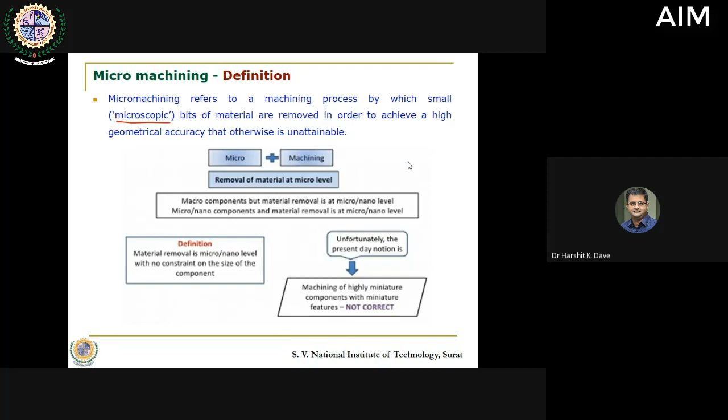Micro machining refers to a machining process in which the material removed is in microscopic range, in a very small quantity and small size, which helps us achieve higher geometrical accuracy. So our intention is to improve the geometrical accuracy. Rather than going for a tolerance of say 50 microns, I want to go for a tolerance of 5 microns. But if I'm trying to make something of 5 mm and then expect 5 microns, that is a difficult task. With 5 mm, if I try to achieve a tolerance limit of 50 microns, that is doable. So if you want tighter and tighter accuracy and tolerances, you need to work at smaller dimensions.

Generally, it is believed that the ability to obtain the tolerance level at the micro domain has to be 1/10th. So if you are trying to produce a dimension of 100 microns, you can assume a tolerance of maximum 10 microns. Now, if you have a tolerance of 50 microns when making something at 100 microns, that is of no significance. So when you are trying to produce a part, a feature, or a product in micro scale, that is usually termed as micro fabrication. But when we talk about micro machining, our intention is to create or produce a feature or dimension that is in the micro domain. Here we combine micro as a size component and machining as an activity.

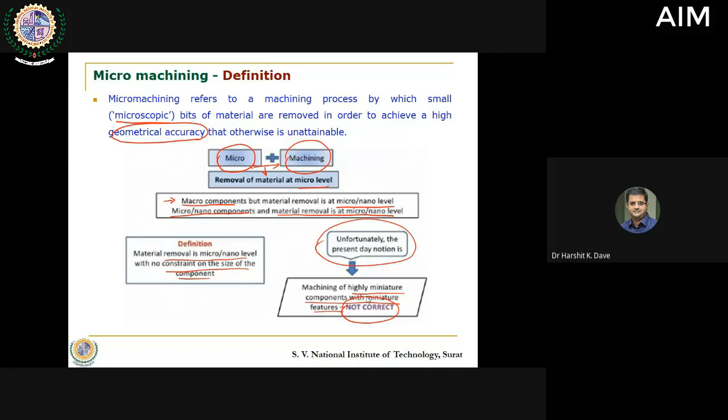Often we have trouble understanding this. We have a wrong notion that machining highly miniature components with miniature features can be termed micro machining. That is not correct. When I talk about micro machining, my intention is to create very miniature, tiny features on the part, which may or may not be in the micro size.

When we classify micro machining, there are different ways of classifying micro machining or micro fabrication activities. In case of micro fabrication, one way is material deposition and the other is material removal. Micro machining focuses more on the removal aspect. But micro fabrication also includes various deposition methods like electro discharge deposition, chemical vapor deposition, physical vapor deposition, rapid prototyping (3D printing), LIGA, and electrochemical spark deposition.

When we talk about micro machining, our understanding falls into two domains: traditional material removal and advanced material removal. If I take a simple conventional lathe machine and carry out turning, when I provide a depth of cut, I can go up to 0.5 mm, meaning I am removing material of size 500 microns.

So as per the definition in microfabrication, that can be termed micro machining because I am removing material. But am I creating a feature in the micro domain? No, I'm just removing the material. The part remains as it is.

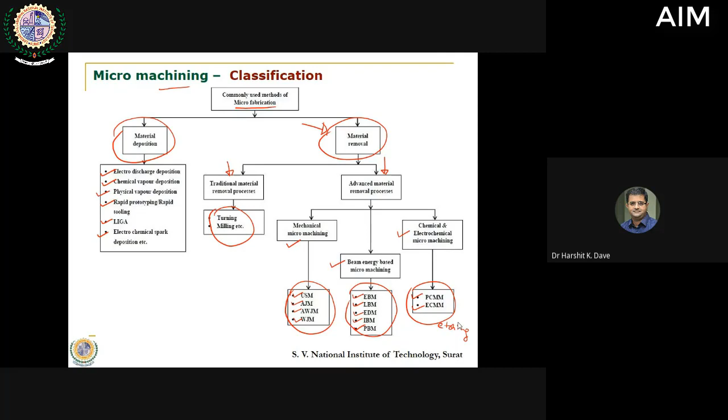The other way is termed micro manufacturing process, often from the interest of MEMS and electronics background. There the processes are classified either as MEMS lithography based or non-MEMS, non-lithography based. All processes discussed earlier fall into this category. You can have micro mechanical cutting as a non-MEMS activity, with micro turning, micro drilling, micro milling, all forms of micro machining, and finishing processes like micro grinding.

Other processes include laser based processes, thermal based processes, and to some extent fabrications into the forming, micro forming domain, also classified as non-MEMS based micro manufacturing techniques. In case of MEMS based, the most widely used is the photolithography process.

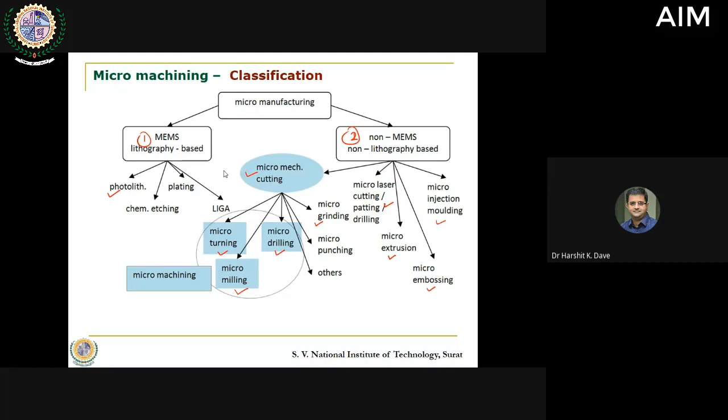I'll initiate slightly with photolithography before moving to the processes I want to discuss in detail. In photolithography, we can have additive deposition as well as subtractive etching. We deposit some material first, then remove some material, and eventually get the product. There are different ways of doing it.

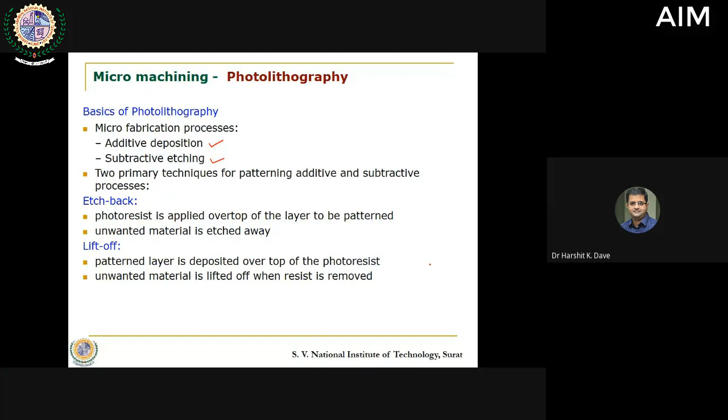One of the most widely used ways is shown in the figure. Suppose a desired material, some form of rubber or plastic, is to have features generated on it. That part is laid and deposited on a thin film, then coated with a photoresist. There is a mask - viewed from the top, if it's a round part, you deposit some sort of cover over it this way.

This is the cover. So if I take a cross section over here, I see this one. This is what I see over here. This is what is visible to us.

Now what we do is, after coating this with a photoresist, we use this as a mask and pass some sort of laser energy, or maybe some UV light, and we burn the material. So nothing happens to this part, but this part is burnt. Now it is etched, it is removed. First we deposited, and now we are removing this. So when I remove this part, and then remove this photoresist, this one is removed.

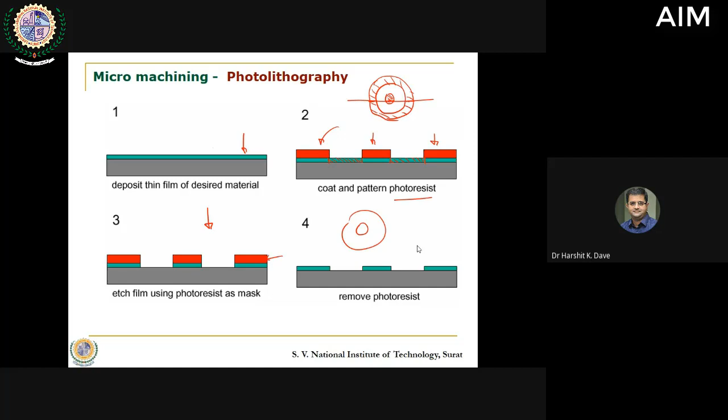So eventually you get the part that you wanted to have. This is what we wanted. We wanted to generate a boundary with a pillar inside. So this is what you wanted, and that you have created. In case of photolithography, this entire process can be finished in a matter of seconds. But the process of depositing these thin films of the desired material and then putting photoresist over it with utmost accuracy, and then passing the light, that arrangement often takes some time, but otherwise the process is very fast and very accurate. So this is how the process is done, where you use some sort of mask and some sort of light to carry out the activity.

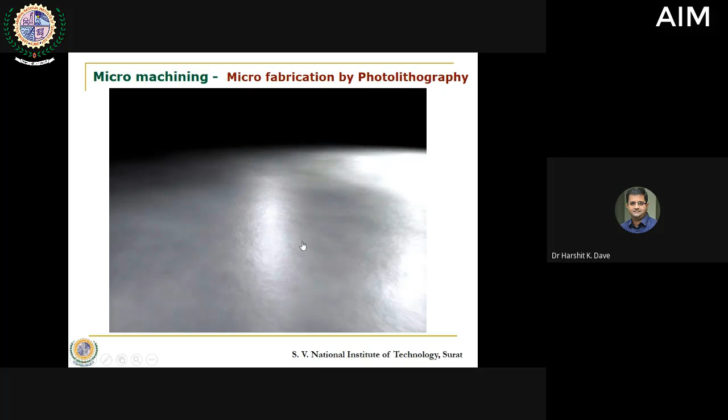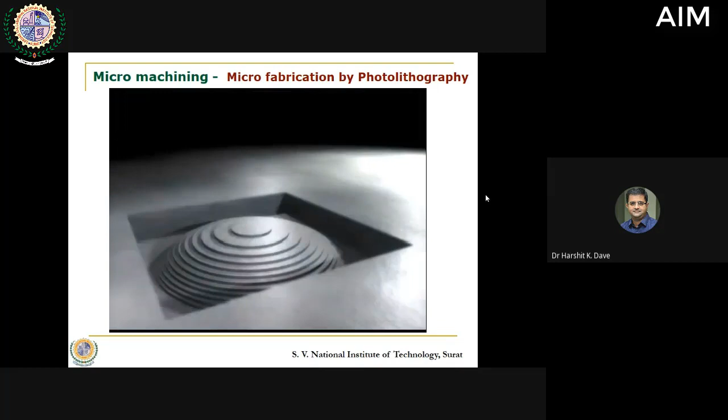This is one such video of a part. So here what you are doing is, you have laid it and you are just scanning it in a way that you are able to remove the part. So one after the other, each layer, more and more amount of material is removed, and a feature is generated.

Another process where lithography is used is the LIGA process. Here there are three aspects, three different activities being simultaneously done. The lithography is done, electroplating is done, as well as plastic molding is done. So it is possible that this process is highly accurate. It is possible to go for very high aspect ratio. It is possible to go for very small structures in the sub-micron range, and you can get very good quality smooth finished walls. If you measure the roughness of those walls, you get it somewhere close to 0.05 microns, 50 nanometers. So that is the level of accuracy you may get.

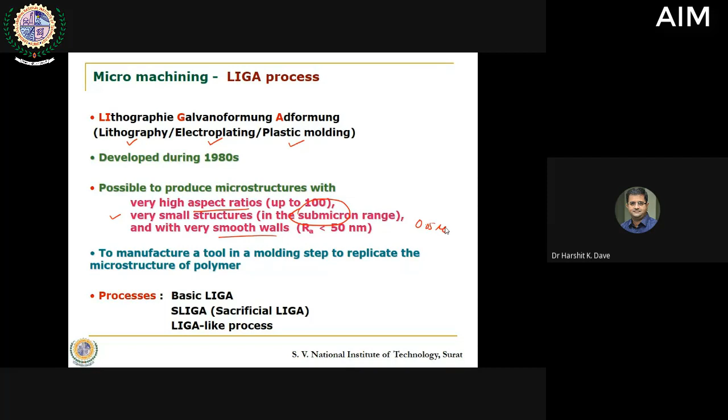But again, this process is a costly affair. What happens is you need to select a base material. Say for example, PMMA material is selected as a base material. So that is being created. Now it would be somewhat similar to the way we create a pattern and a mold. So this would be used as a mold. I use a photoresist, a mask, and then I pass X-ray radiation. So whatever feature you want to generate, that feature is present over here.

And because of these X-ray radiations, you create a specific cavity over here, and this cavity is opened up. Now here you use an electroplating process and you fill this cavity with the desired material. It can be metal particles, or through metal deposition. So that metal is deposited over here. You initially etched and created a mold, and then deposited metal into it. Later on, you carried out the same process and burned this entire mold. So eventually you get the separate metallic component. So this is how the LIGA process takes place, and you get a metallic component at the end of the process.

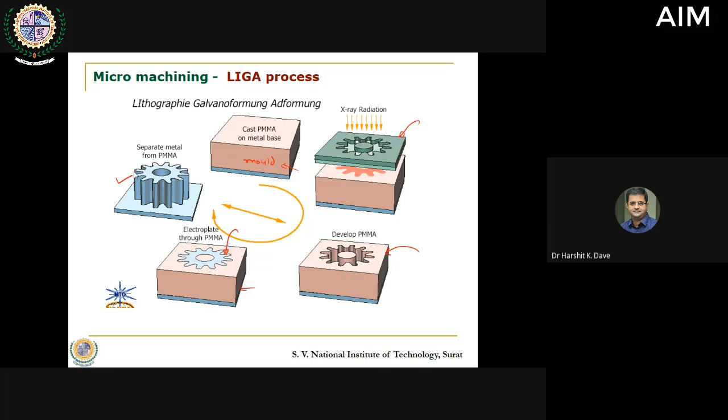Now this is the same process shown in a different manner. You have a mask membrane and some sort of absorbers. Through the absorbers, the X-ray radiation is absorbed, and that is passed through the base material, and in that resist it is protected. So here what you did was put up a mask, and on the mask you put up an absorber structure. The radiation is absorbed by this absorber structure, this pink color structure, and the rest of the material is burned. So based on that, you get a structure of the base material.

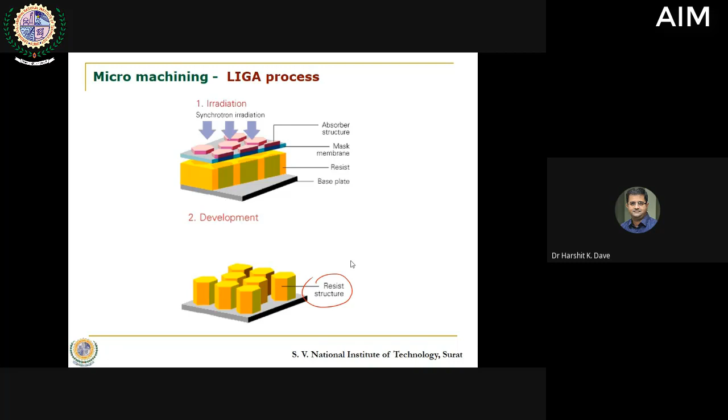So instead of creating a cavity, you have created a full 3D design over it. Now this design is filled with metal. So here you fill this with some sort of metal. You connect it with an electroplating process.

They call it electroforming. You connect it, and because it acts and attracts, this metal is deposited around, and at a later stage this resist structure is burnt and removed. So you get a different sort of mold cavity. Now large sizes of such molds can be created, which otherwise may not be possible by the usual casting process.

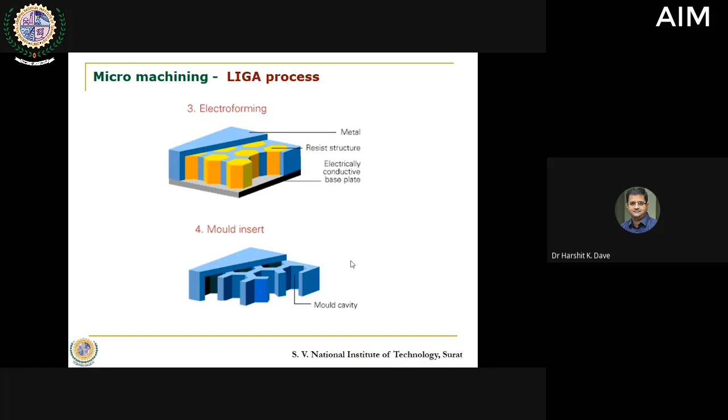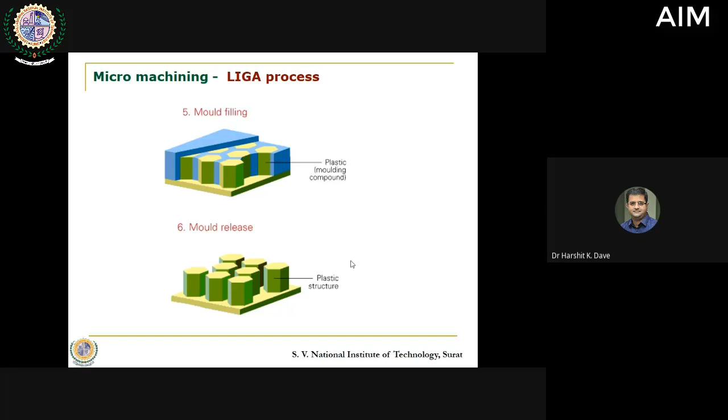3D printing is a different scenario. Even today it is trying to take over even the LIGA and photolithography activities, but this has been one of the most widely used activities as on date in the open market. So this is being done, and you fill it with some plastic material, and eventually you get the components that you decide to have. So this is how the process is carried out.

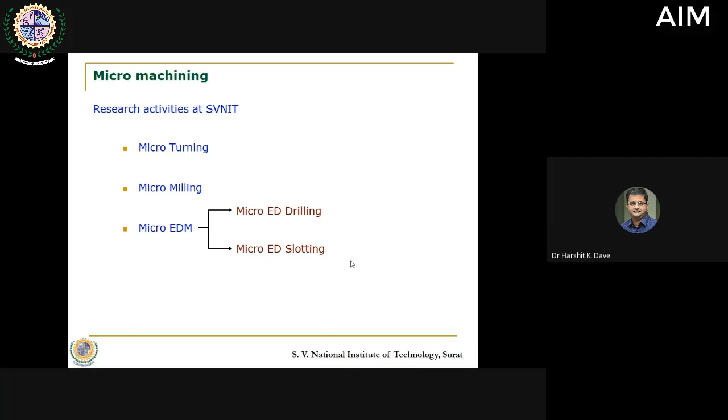Now, when we talk about micro turning, the first thing that comes to our mind is, as per our definition, the part can be large, and on that large machine or large component, we may create micro features. But yes, there are problems associated with it, which I will discuss in the coming slides. To overcome those problems, people attempted to create smaller sized machines.

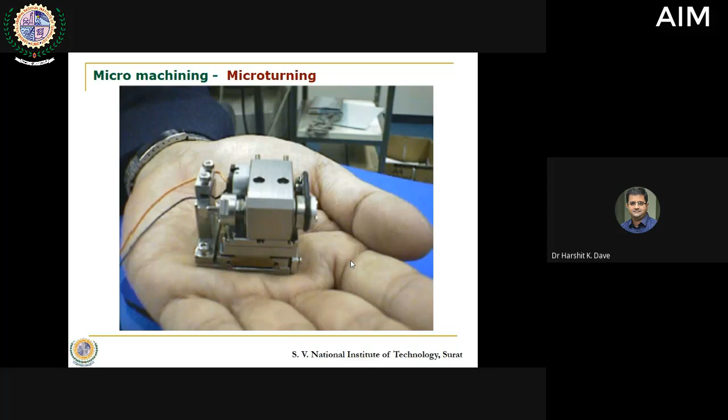The micro turning setup that we use is not as small as you see in this image, but it is possible to create a micro turning machine as small as one which can be held in your hands. That possibility is also there, and people have demonstrated working on it. However, it has not worked to that extent and has not been that successful. However, the tabletop setups are very successful in carrying out the micro turning process.

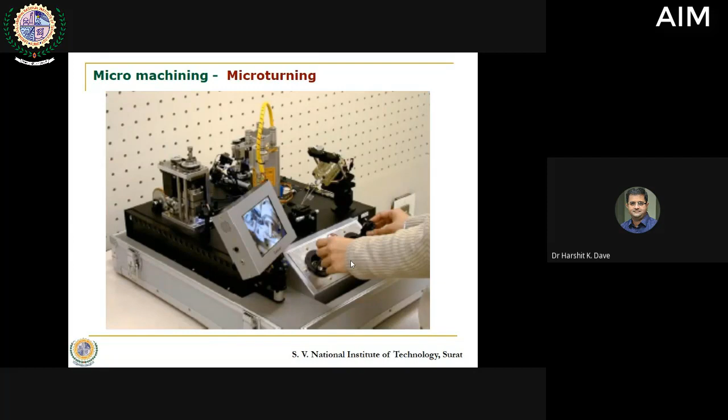Even this is another setup. You can have a micro factory with micro turn lathe machines, and then you can fit them in your suitcase and carry them anywhere you want. You can set up, do the task, and return back home. So the micro workshop or micro factory can also be set up with proper sensing devices, which can be effective to control the dimension and the process.

So in micro turning, our interest is to create features which are in the domain of say 1, 10, 100 microns. So there we will need to go for smaller tools. You can see over here the size of this tool, the face, the rake surface you can see, this is almost equal to 10 microns.

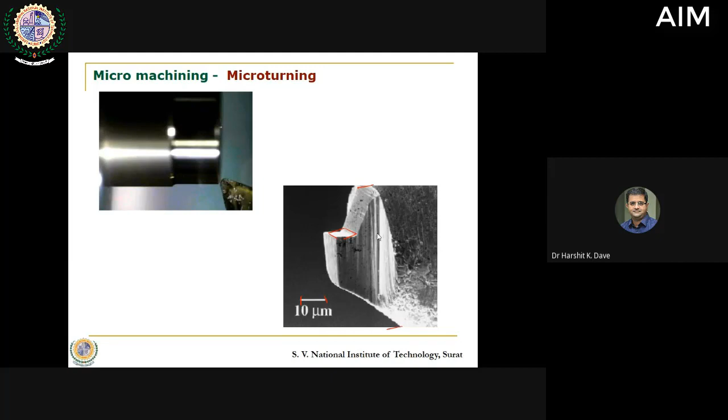So that is the small size of tool that can be generated. Assuming this would be 100 microns, then it is as good as the size of a human hair, which is around 90 to 100 microns in diameter. Just assume the size of the tool that has been attempted. This type of tool is generally used for diamond turning process, where the depth of cut is in nano features and mirror finished surfaces are required. However, there are very few such machines, maybe one or two only in India, and those can be counted in numbers if you count universally.

Now there is an interesting task reported by Professor Rahman and his team, and this was the inspiration after which we thought of working in that area. Of course, not to that level of significant work that has been done, but we have initiated doing this to some extent. You can see the micro pin that is generated. This is the micro pin visible in this image, and you can compare it with the lead of the clutch pencil we use, which is 0.5 mm diameter.

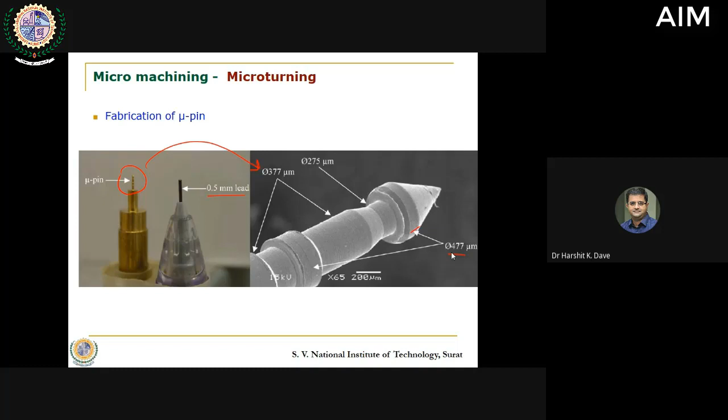So the maximum diameter that you can record over here is for this surface, which is 477 microns. So in this entire thing, you can see the tapers are generated, you can see the steps are generated. So all forms of the turning process are being attempted in this. You need to have a rod first, and on that rod you need to carry out this process.

Now the problem that you face over here, because of which attempts on a larger machine to create micro features do not work effectively - those problems can be few. One of them is the deflection that occurs in the micro shaft that you initially generate. So when you try to create this shaft of a small diameter, say if this is 500 microns...

So while doing that and machining on this part, taper is generated, the slots that are being generated have larger size grooves. In such a scenario, if you have a larger size cutting tool, it is not possible.

So theoretically, even though it is possible to generate micro features with a conventional machine, practically the problem we encounter is the deflection of this micro shaft, which would eventually lead into breakage of it. So often this does not work.

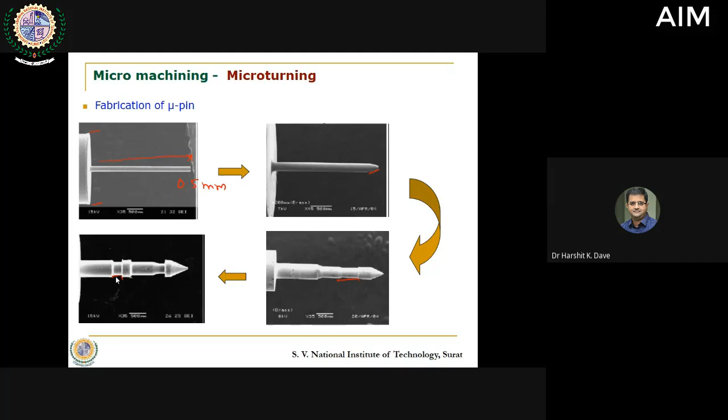This is the setup that we have used for various activities. This setup is a Hyper 15 machine. It has its own G and M code programming language, and it accepts the program through that language.

Though you can create that program in Excel or in Word, and you can import or export it to this software, the compatibility is only with the given software.

Here it is possible to work on micro turning, micro milling, micro EDM, and micro electro discharge grinding. We have tried to attempt almost all of these processes to some extent.

It is also possible to slightly modify the setup and have micro ECM also, but then you will need to work on the brine solution, and that can lead to contamination and corrosion, and that is why we have avoided going for that process.

Now, when we attempted to go for micro turning, here is the spindle, and this spindle rotates, and then whatever circular object that you want to have can be attached to this chuck.

So here you have a structure where you can attach something. If you want to go for EDM, this would serve as a tool. So this becomes a tool holder.

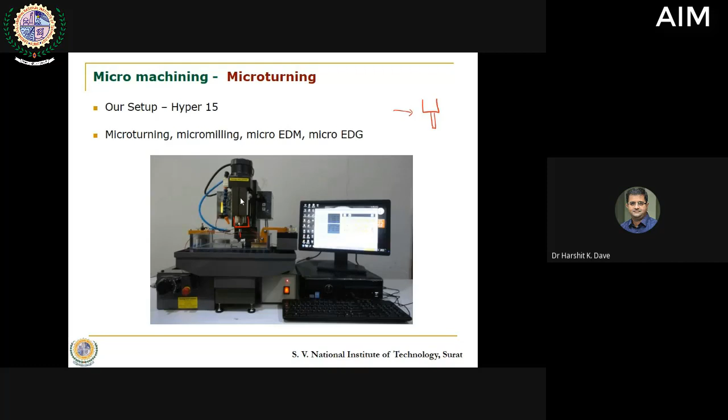Instead of conventional lathe machines, in this particular setup, you have the workpiece rotating on a vertical axis. You also need to take care of the tool holder movement and the workpiece movement with the help of proper CNC machining.

We used a PCD based micro tool, and brass was used to fabricate and create the micro shafts. The length of the workpiece that we used was 4 centimeters, brass of 4 centimeter length, and the diameter was maintained at 4 mm.

We carried out proper grinding of these edges, and we also carried out proper centering of this part when it was put up on a vertical axis. And what we tried to do was reduce this diameter from 4 mm.

We tried to reduce it to 1.5 mm. So initially up to 1.5 mm, and later we went up to 0.5 mm also.

So in all these cases, we took the depth of cut of 0.1 mm, which is 100 microns, and the machining length that we took was up to 5 mm. So eventually this is what we tried to do, this is what we tried to carry out.

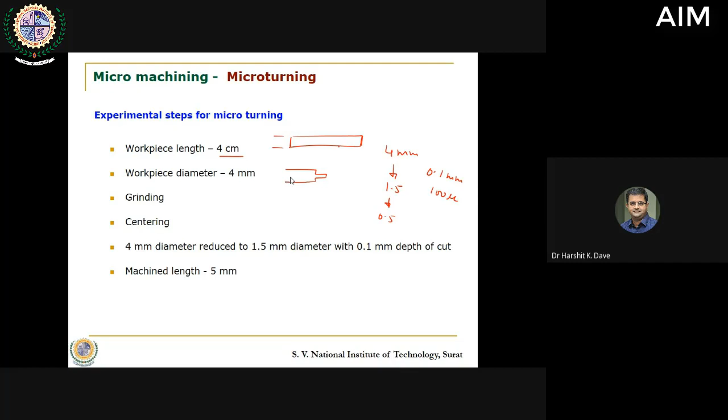Initially we tried to reach 1.5 mm, and all those tools where 1.5 mm was achieved, we further used it as a raw material for generating a 0.5 mm diameter shaft. So first we tried to create a basic raw workpiece material with 1.5 mm diameter, on which we worked to go up to 0.5 mm diameter.

This is a clip of that activity. This is a 1.5 mm diameter tool, with a depth of cut of 0.1 mm. You can see this is the PCD tool. The workpiece is rotating, and you can see the micro size of chips being formed.

We also studied the chips. The chip size ranges from 20 microns to around 100 microns in size.

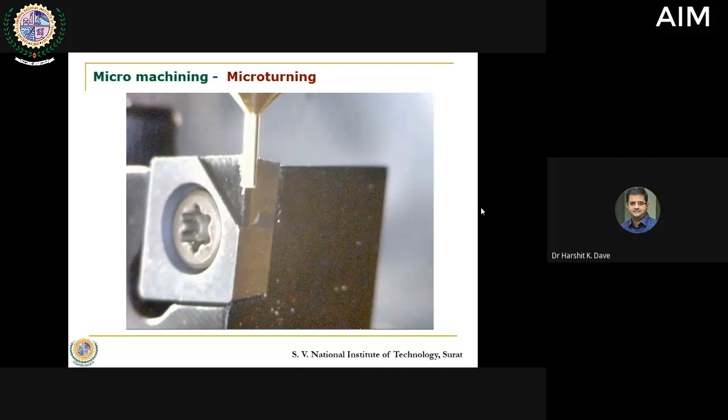But this is one such cut that is being initiated, and eventually we carried this out up to 5 mm. So this entire length that you see over here, from here to here, that length is 5 mm. And on that 5 mm, we took 0.1 mm depth of cut and started machining.

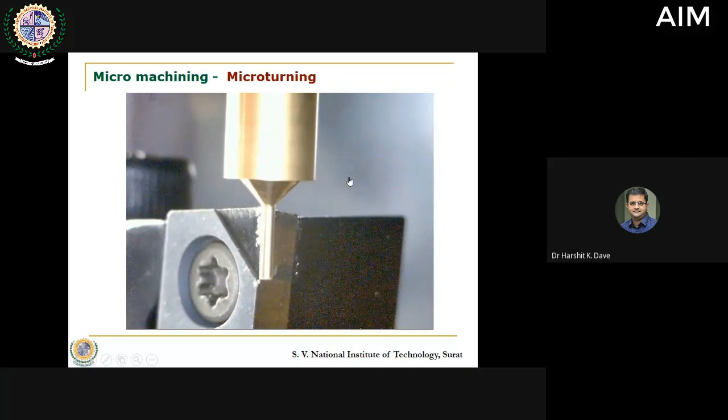Eventually, after every machining, you can assume that each machining pass set, say in 10 passes, will reduce 1 mm. So from 1.5 we went to 0.5. We had to take a large number of cuts. Now we tried, and effectively we could produce it.

One such case I want to specifically highlight. Here, at some position, we could measure the diameter at exactly 0.5 mm as per our requirement. 500 microns was possible. However, what we found is that there is a taper here.

The dimension increases, something like this. The main reason behind this is because it is a cantilever type of structure. So for a particular combination of speed, feed, and depth of cut, probably because of no support at the end, deflection occurred more over there.

So here, if this is the tool, and if this is the workpiece, and this is how the tool is placed, then because of the deflection, it did not result into suitable machining. However, in most of the cases under similar situations, this micro shaft breaks.

But in one particular case, somehow it did not break, and we observed that a sort of reverse taper occurs. So even though the tool might be coming into contact with the workpiece, it may not result into proper machining, and that may be the reason.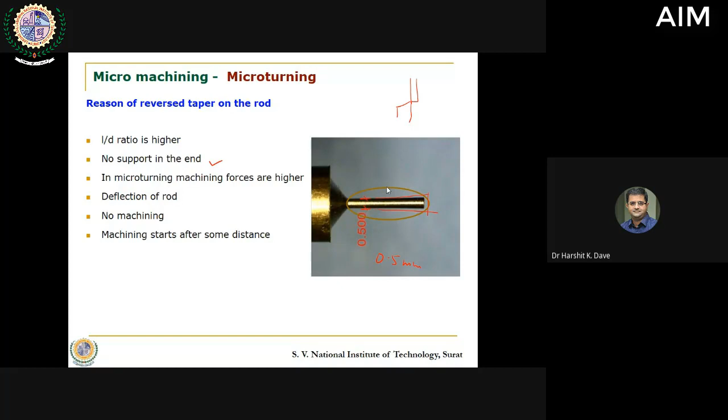Another reason we thought of was that the real machining started after moving across some distance, because the deflection that occurs at the end is larger than what occurs towards the base. So when this deflection slightly reduced, actual machining started, and because of that, probably we could get a reverse taper over this. So this is one interesting work that we have carried out.

Another task that we tried to carry out is related to micro milling. Micro milling represents the downscaling of the regular conventional milling process itself, wherein you use end mill cutters just as in the milling process, but here the diameter of these end mill cutters are in the sub-millimeter range. They are too small, less than 1 mm diameter.

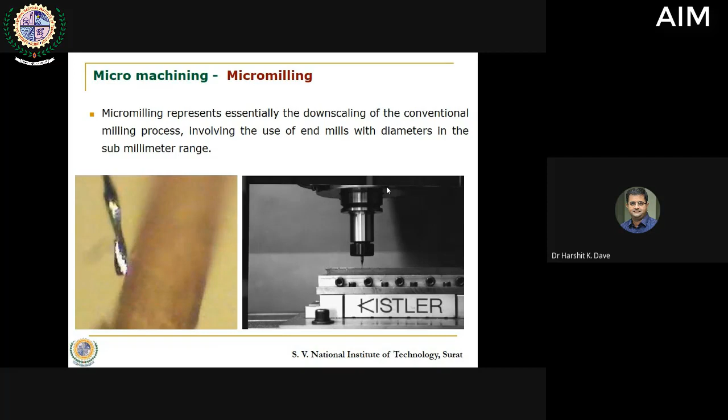There is an interesting work carried out by a group under Dr. Bamberg at the University of Utah, where they tried to produce a 4-fluted peripheral end milling cutter, something like this. This is what they tried to produce, an end mill cutter of this shape, a peripheral end mill cutter. This is what we have been using.

What they did was, initially they created a hexagonal structure. This is what they got. On this hexagon, they used some sort of machining at a peculiar angle. For example, this was machined in a way that this much portion is removed, and this portion is removed. So when you remove this, eventually here you generate a cutting edge.

Then again you remove some material from here. So this is how it worked. It may not be in the exact straight line which I am showing, but it was slightly curved. So instead of this, they made it like this. Then on the other edge, they again turned it and created an edge.

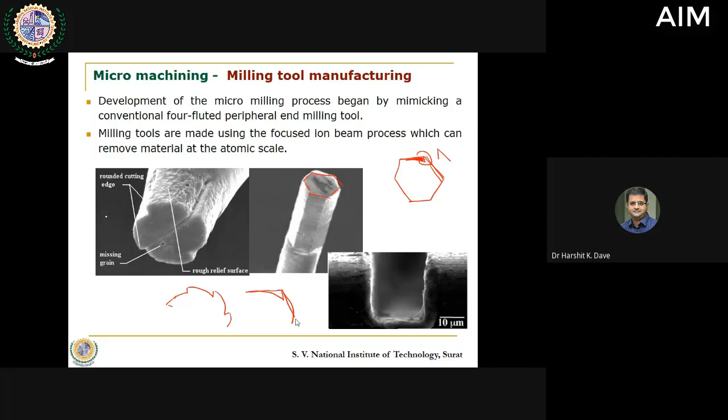So that sort of etching is carried out using an ion beam process, and at atomic level you could create a very small feature on an end mill cutter. However, this is not widely accepted, and because of cost issues, such micro-featured end mill cutters are not easily available in the market.

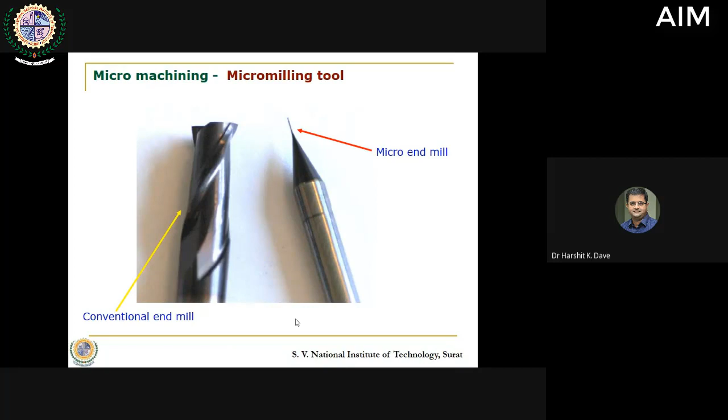But you can see if you compare a conventional end mill cutter with a micro end mill cutter, the dimension is quite clear from the image itself. The micro domain, say 0.5 mm diameter, would be quite smaller in size.

What we tried to do was create a micro 3D cavity with the help of micro milling, and we used our desktop CNC machine to carry out the same task.

We varied the speed between 1000 to 2000 rpm, and varied the feed from 10 to 50 mm per minute. We maintained a uniform depth of cut of 25 microns in each cut.

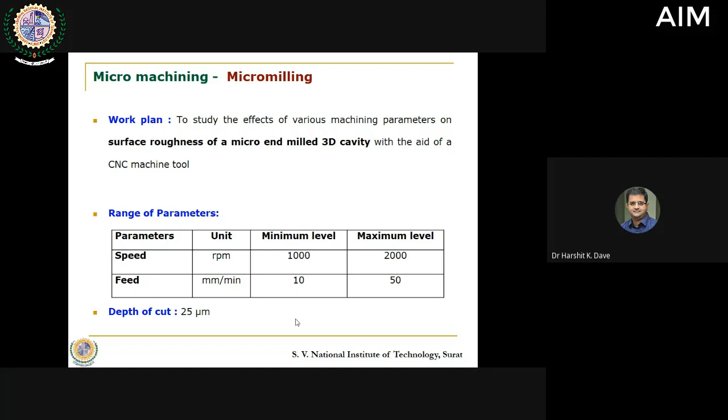We used aluminum as our workpiece material and created a specific size of cubic part. We machined it well on all 6 sides and carried out buffing to get the best possible dimensional and feature accuracy.

We used a micro end mill tool with a tip diameter of 1 mm, since we did not have a 0.5 mm tool at that time. So we used the 1 mm tool to generate micro features starting from 25 microns to slightly larger size. This was a tungsten carbide tool coated with a titanium, aluminum, chromium based coating material. The shank diameter was 3 mm.

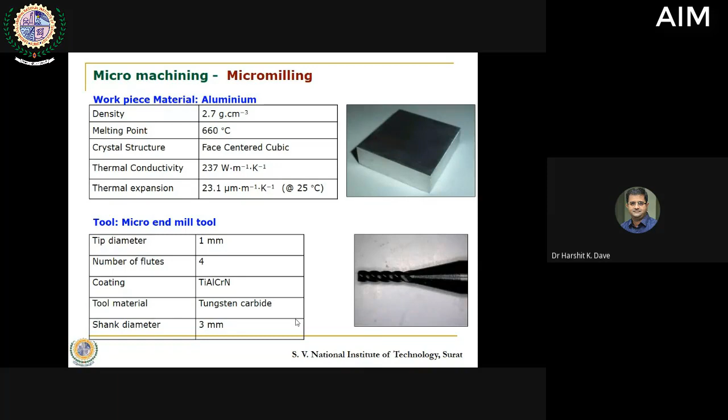Now what we did was create steps over it. These are the features that we created. So on this workpiece, on this edge, you can see the edge that we created over here.

First we removed this entire plane and created one step. Then we removed this much square surface and created another step. Then we removed this smaller patch and created another step. Finally we created the smallest part, which gave rise to this step.

So this is the real workpiece material that is visible. You can see the steps that we have created. We maintained the width of each step as 1 mm, and subsequently the size reduced from 6 mm to 3 mm.

The total height of this feature was 1 mm. So the total height of this step, if I see this step, is 1 mm. And each step that we generated is 250 microns.

So though we used a regular desktop tabletop CNC milling machine with a 1 mm diameter cutting tool, we tried to produce features in the micro domain. We then observed it under a vision measuring system to check the dimensional accuracy and the quality of the surface generated with the help of that setup.

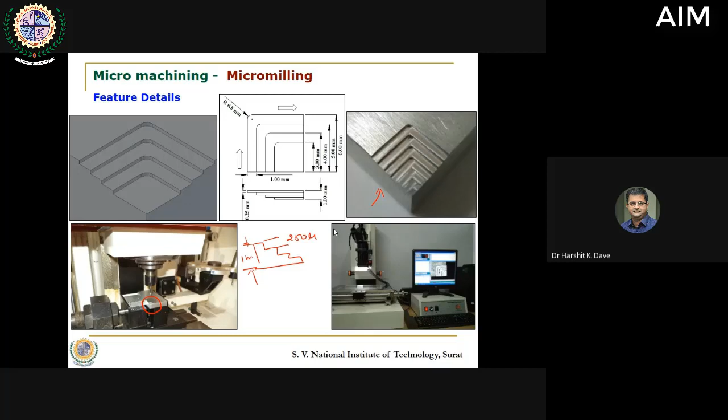You can see this activity being carried out. Here you can see our XL mill, the MTAB CNC milling machine.

Though the quality is poor, because at that point of time we did not have a proper camera to capture it, and there is a glass cover in between, which is why the recording is slightly poor.

But you can observe that this step is being generated right now. The tool is passing over one side, and then it moves along the other side. This is probably the edge of the first part.

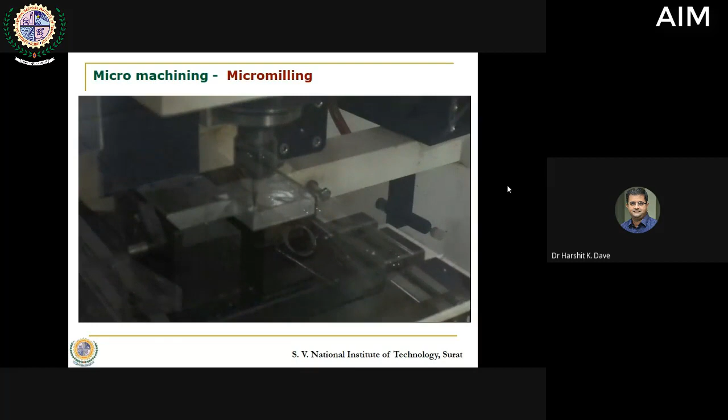It is returning back, and one such entire layer is being removed. So now this is the second pass, being initiated. This was not that clear, but from here it might be slightly clearer. You can see that these steps are being generated.

What we did was try to measure its dimensional accuracy and form accuracy, and then measure the surface roughness on it. Because the end mill cutter used is 1 mm in diameter, you do not have an option to reduce the width of this path, so this remains 1 mm.

This is the entry side. The tool started moving from here and eventually went this way. Then here, this was one thing that was cut, then we cut this over here. This is how it goes.

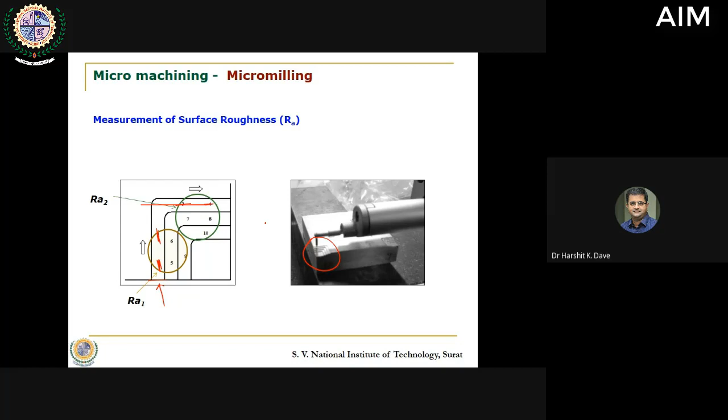So these are different points where the roughness was measured. Initially roughness was measured at this location, then at this location, then over here, then over here. This is how it went through all the particular positions of these steps. What we found...

One important finding was that if we are able to lubricate during the process, constantly supply drops of lubrication - somehow kerosene did not work, regular dielectric fluid did not work, the oil that we usually use for lubrication did not work. I don't know the reason still, but diesel worked well. So drops of diesel were put, because of which the finish obtained was in the range of sub-micron level.

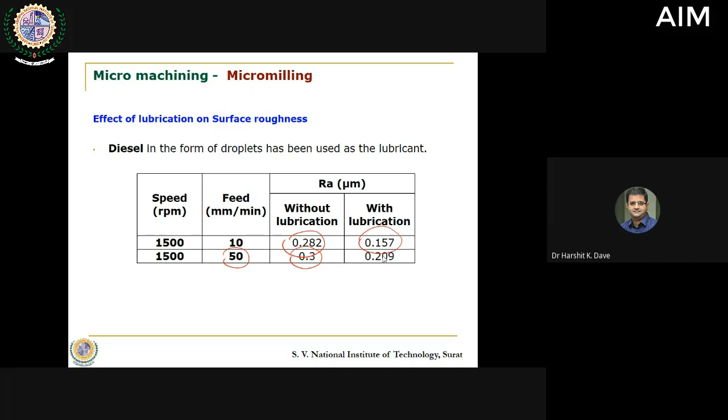Without lubrication, you got a roughness value of almost 0.3 microns, and with lubrication it reduced to half, 0.15 microns. Similarly, for the higher feed, we got a roughness of 0.3 microns, which is almost similar to what we get, but here at higher feed we got a roughness of 0.2. So there is probably a reduction of one-third of the roughness value. That is one good observation we saw.

The other observation was that the roughness was greater at the exit, so Ra2 was more than Ra1 for all experiments. That may be because the chips would accumulate at the tool tip and resist the actual machining being carried out. We observed that tiny particles would adhere to it, so there was built-up edge formation to a larger extent, and the aluminum material would stick to the tool, and then you will have to clean it. In the meantime, it might get slightly blunt and result into poor quality of machining at a later stage.

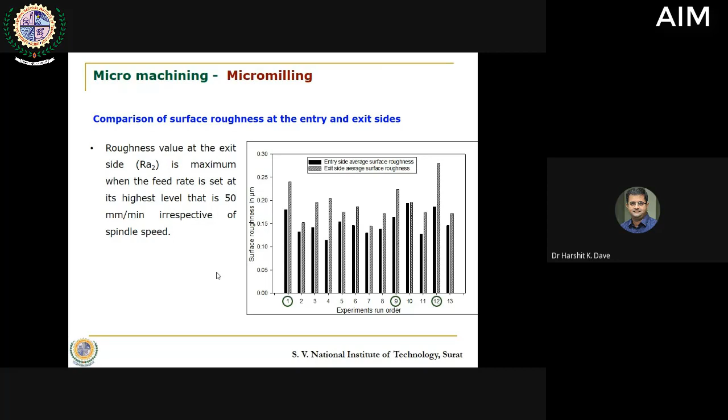When the feed value was maximum, we found that feed has the maximum effect when the feed was at the highest level. In this particular case of reading number 1, 9, and 12, the feed value was at 50 mm per minute, which was the highest selected value. So whatever be the spindle speed, when the feed increased, we observed that roughness increased. So feed is found to be an influential factor on roughness value at micro, sub-micro level instead of the spindle speed value.

The third aspect of our work is related to micro EDM. In case of micro EDM, what you do is you melt the material and you vaporize the material for the material removal. This happens - the melting and vaporization - in a fraction of a second, and that too happens thousands of times. So the feature quality is quite better than what turning or milling would give you, and the process may result into reduction in the tooling cost because there is no contact between tool and workpiece.

However, there are some differences if you compare EDM process and micro EDM process. The first one is related to the circuitry that it has. In EDM nowadays, you don't have the capacitor circuit. Nowadays it is fully enabled with electronics, and the control of the timings of on and off time is done through electronic pulses, which is why those on and off times are known as pulse on time and pulse off time, because in EDM you do not control them with the help of charging and discharging of capacitors.

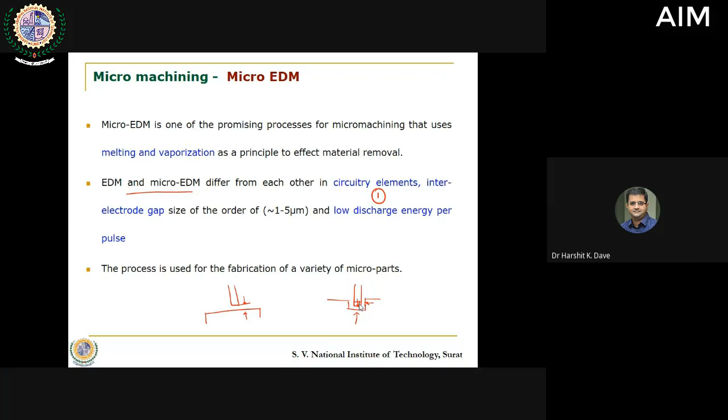Another important difference is related to the amount of energy used per spark. The discharge energy per pulse per spark is very less - almost 1,000 times less than what you have in case of EDM. So it is possible to generate even smaller features than what you generate in regular EDM process. So microfabrication with micro EDM is a very fantastic task.

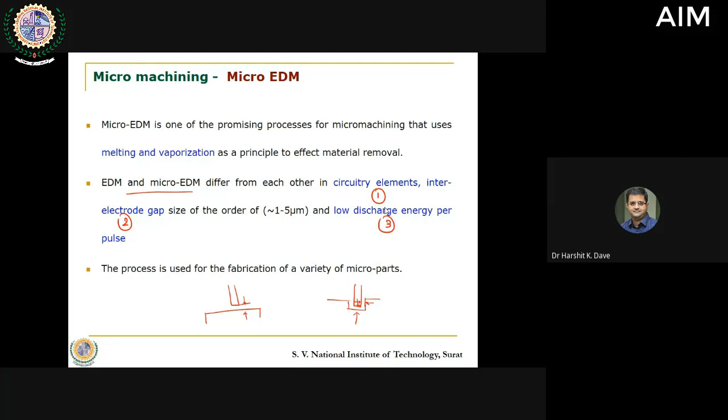Only problem is it is a very slow process, slower than the regular EDM process. If you carry out a task on EDM to remove a certain amount of material, or reduce a feature by 1/10 of its size, the time required on EDM is 1/10 of what you require on micro EDM. So the simple tasks I am going to show you would take around 30 to 40 hours of machining. That way, it is not a suitable process for producing parts in large quantity.

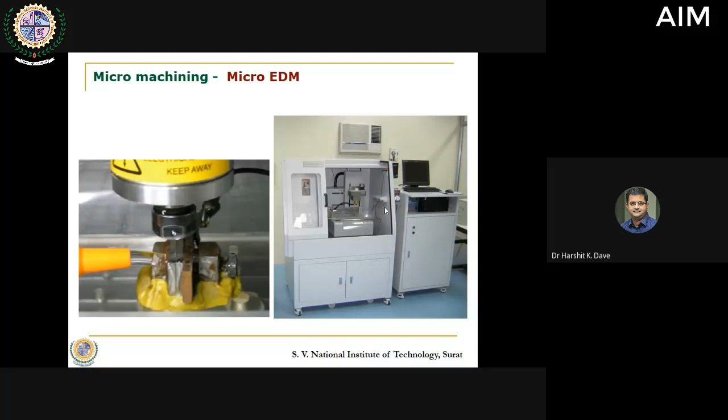This is one such setup of micro EDM which is commercially available from Mikrotools, a Singapore based company, devised by Dr. Rahman. One such machine you might have seen if you visited IIT Bombay or IIT Kanpur.

There are various applications in the micro EDM domain. You can fabricate micro holes, create micro pins, say micro electrodes for micro EDM which would be used as micro tools. You can generate micro slits and grooves. A semi-cylindrical groove of 10.5 plus or minus 1 micron was produced.

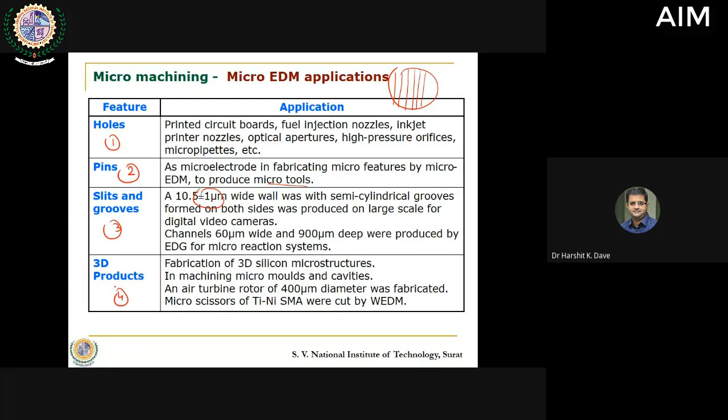Similarly, in cryogenic applications you need to generate large surface area, so fin structures are generated. These fins generated on a copper tube have a width of 10 microns, and the space in between is around 50 microns. Generating that is also an interesting task. Similarly, 3D patterns and 3D objects can also be generated with the help of a micro EDM machine.

There are different variants of micro EDM. The regular one is the micro die sinking process. You can also carry out micro wire EDM, micro electro discharge drilling process, electro discharge grinding or wire electro discharge grinding process, and electro discharge milling. To some extent you can also work on reverse micro EDM, wherein instead of generating cavities you generate 3D features. In a way that leads to a process somewhat like 3D printing.

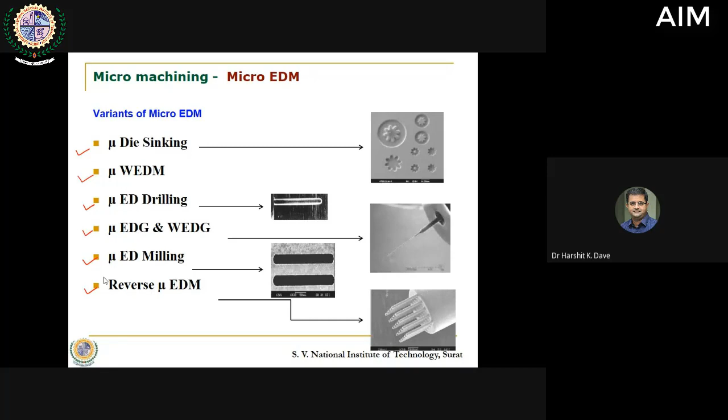Now we initiated some work on micro EDM where we wanted to carry out the drilling process initially. We used aluminum thin sheets having thickness of 0.28 mm, 0.38 mm, 0.53 mm and finally 0.71 mm, all within the micro domain range. These sheets were cut into pieces of 25 by 25, cut from a larger sheet one by one. This was required to ensure the pieces could later be made properly flat so there is no discrepancy in the features we generate.

We used tungsten rods as our tool material. The supplier of the machine provided tungsten rods of 0.3 mm diameter, 300 microns, but the length is 12 inches. Now you might think that because this is 0.3 mm, we can easily break it. If you try to break this, something happens. Or you can think we may use a mechanical hacksaw and cut it - that is also a possibility.

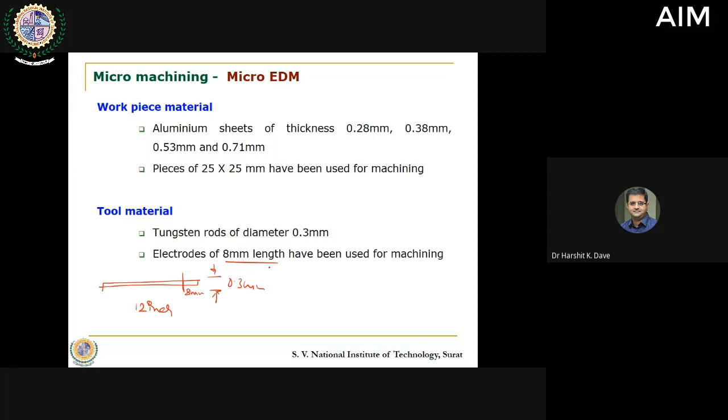Now that was a very tedious task. We wanted to cut electrodes from this with a length of 8 mm and 0.3 mm diameter. That is what we wanted to do.

Now when we tried to cut it through scissors, something like a mechanical scissor, a crack initiated and propagated inside - it was fully cracked. And when we tried to cut it with a hacksaw blade under the minimum possible cutting condition, some pinch effect was visible at the end. You can see it is not perfectly flat and perfect diameter without discrepancy - there is some pinch effect because of which we could not get the proper shape at the end of this 0.3 mm diameter tungsten rod.

Now if it is not perfectly cylindrical in shape, there is no point using it as an electrode. So this was a very big problem. Even the supplier, when we inquired, said he also did not know how to take care of it, and he also tried to work on it but it did not work. But then what we did was think of using tungsten as a workpiece and copper as an electrode, and try to cut it by micro EDM.

So we fitted a very thin foil of copper, fitted with the axis, and we tried to cut this tungsten rod with the help of this foil. When we used straight polarity, there was no effect on the tungsten rod. In fact, this was in a way reverse EDM.

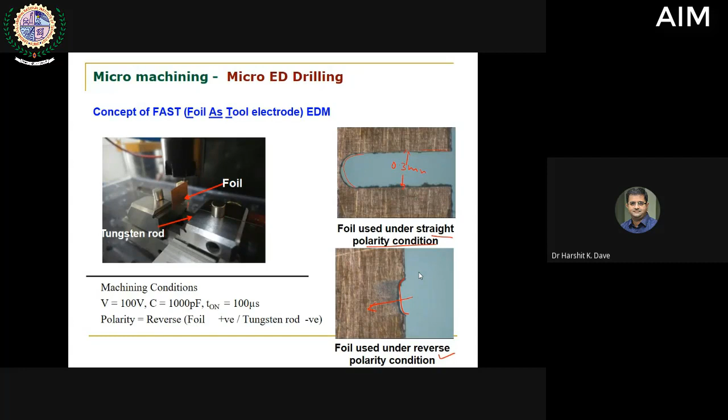But what we observed was, the foil is cut and you observe that a slot is happening over there. When you use reverse polarity, assuming the workpiece itself is the tool and the tool itself is the workpiece, even in that case some sort of cutting happened on the foil, but it did not go further because of the change in polarity.

However, it still did not cut the tungsten rod, so it was almost difficult to do that. I'm trying to show this - this is the foil that we have, and with that foil we are trying to cut. This entire setup is immersed in dielectric fluid. We don't use hydrocarbon oil; we use deionized water, and in that deionized water the attempt is being made.

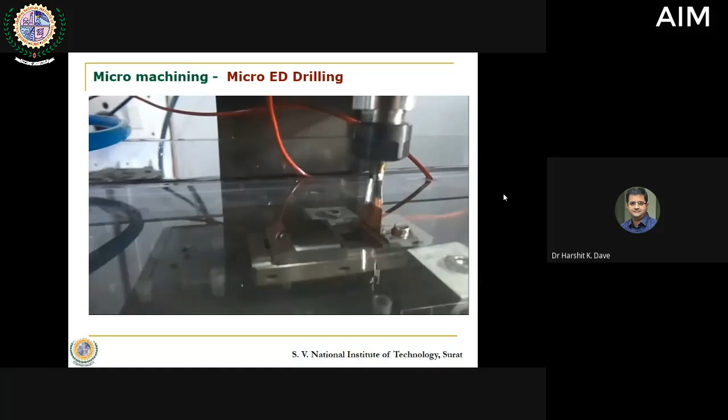Spark being so small in size, it may not be easily visible, but to some extent it might be visible if you can visualize this. So this cutting is going on, and with that eventually we could not cut. So it did not work.

So later on what we did was we used the wire electrodischarge grinding process. We have a spool of wire - this yellow color you see, that is a wire. And this is the rod, our tungsten rod. This tungsten rod is fitted into it, and we started pressing it against this wheel, which has the wire electrodischarge machining process going on.

Now this is meant for grinding of the surface. So if there is a large surface that has to be ground, it is brought into contact with this wire, and that wire will clean the surface and eventually grind it. But we used this not for grinding but for cutting.

How we did that - we just allowed the machine to assume that grinding is going on, and we proceeded with the grinding for a larger depth for the entire pass. So you can see that it was possible to generate a proper shape without any remarkable burrs over it, and now this can work as a tool.

Now it was interesting to notice that if you have, for example, a rod of this length and you are cutting something, this portion is gone, but now you get a surface which is like this. You will have to cut the same way on the other side, because when you cut this, a new surface is exposed and you want that surface to be utilized.

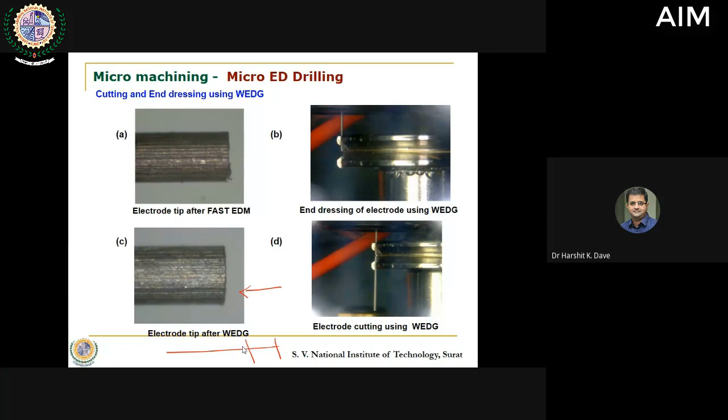So it was not possible to go for rough cutting or finished cutting separately - all cutting had to be finished, so that it effectively gave us the desired small size of tungsten rods for micro drilling. Now with such perfectly cut rods, we carried out micro drilling on aluminum thin foils ranging from 0.3 to 0.7 mm diameter, and under different conditions we observed that there is taper being generated.

You can see here a situation where the highest capacitance was used. In this situation you get the maximum taper - your top diameter is 0.448 and your bottom diameter is 0.352. Actually the tool diameter is 0.3, so a perfect result comes at the end into this particular case only.

But in other cases there is huge overcut happening, and because of that we are getting a slightly larger diameter. Now there is a scope of working over here - there is a very good scope.

What you can do is, can you carry out turning of this tungsten rod and reduce it to say 0.25 or 0.27 or 0.28? How - the way in which you can compensate this overcut. So using 0.3 mm diameter, when you are getting a diameter of say 0.336, this is a case of reverse taper - the top size is smaller and bottom size is larger, so you get a taper like this in that case.

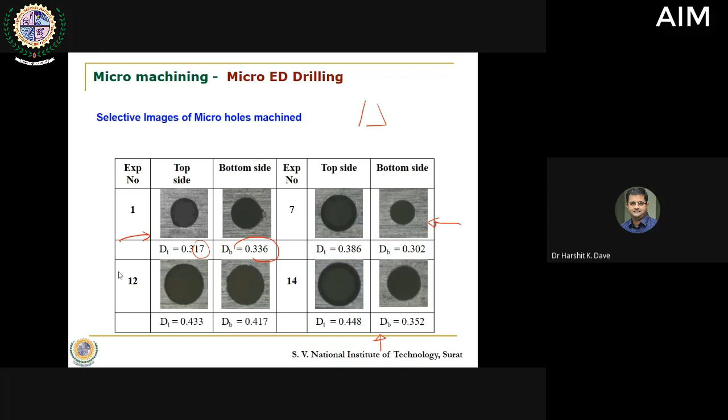So here our intention is that you can turn this tungsten rod and convert it into say 0.017 less than the diameter 0.3. So will it help to compensate the overcut? That is an interesting task. However, you need too much patience to try this out, so eventually we are still not able to do that, but that is something which can eventually be carried out.

Another thing that we tried on generation of micro feature is generating micro slots. In case of generation of micro slot, we thought about whether it is possible to generate this micro slot on our regular EDM machine, and whether it is comparable with what you generate on a micro EDM setup.

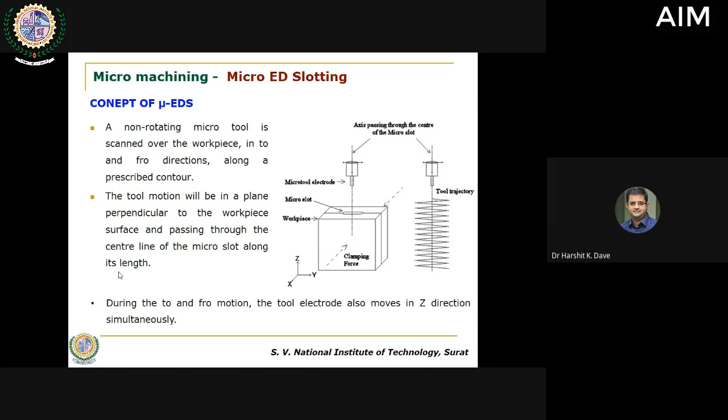So initially we used tungsten rod as a tool material on our regular EDM machine. This is that machine. On this machine, we fitted the small tool holder which you have on the micro machine, and in that tool holder you have this micro tool, the tungsten rod of 0.3 mm diameter.

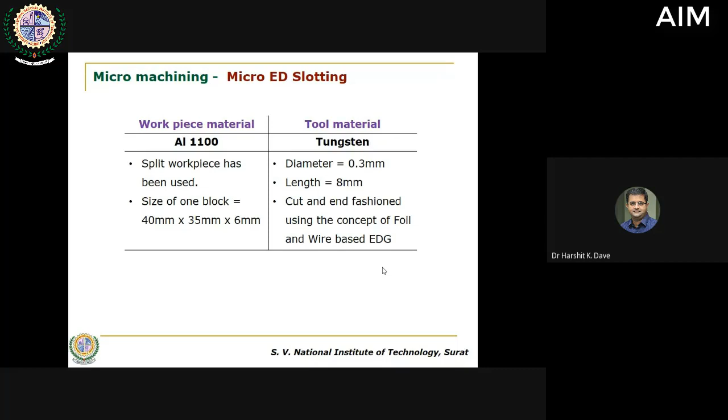This is fitted in our regular conventional EDM, where the minimum current possible is 0.3 ampere. So we worked at 0.3 ampere on different aspects, using aluminum 1100 grade workpiece, with the tungsten rod as our tool material.

What we did was we created a split workpiece. You can see there are two pieces; the split line is slightly visible in some places but not in others. We finished these two blocks, created buffing on them, and attached them firmly so they would not separate. After that, the top surface was again machined, finished and buffed so there is no disparity, and we tried to adjust the position of the tool.

This is roughly 0.3 mm diameter, theoretically. We adjusted the tool exactly on the center line, so that half of the cavity gets generated on one side of the part and half on the other part. So once you open it up, you will be able to see the open slot, where you can take measurements and observations on the scanning electron microscope also.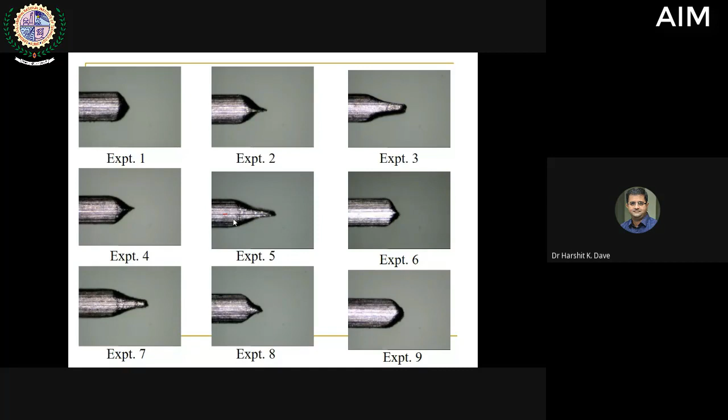You would be surprised to see that in many other cases, instead of this taper-type tool wear, we observed deposition of material. You can see material getting deposited here. There is a process known as electrodischarge deposition. Without intention, we carried out electrodischarge deposition: the material that separates and wears out does not go into the bubbling dielectric fluid, but settles back on the tool itself.

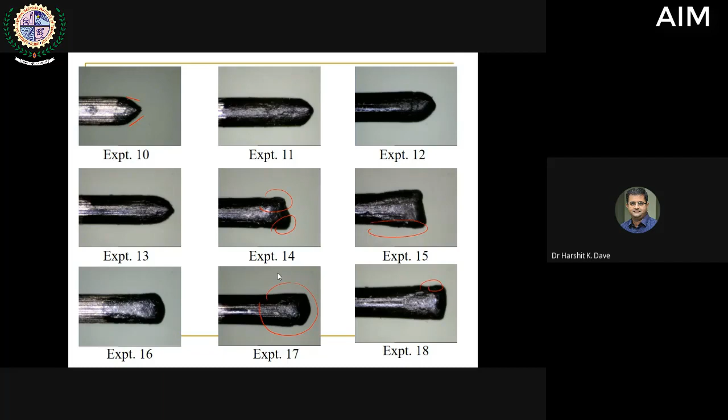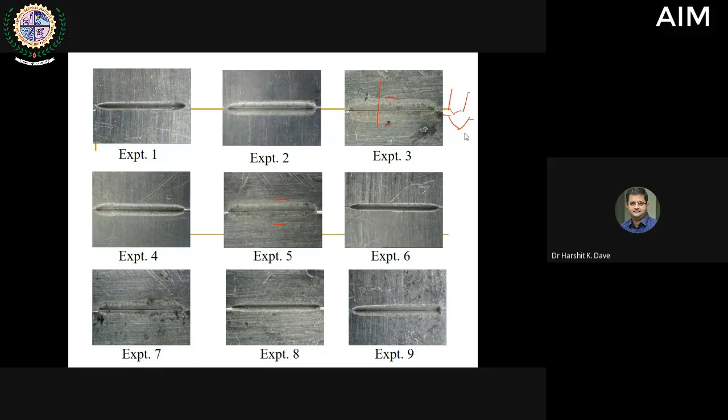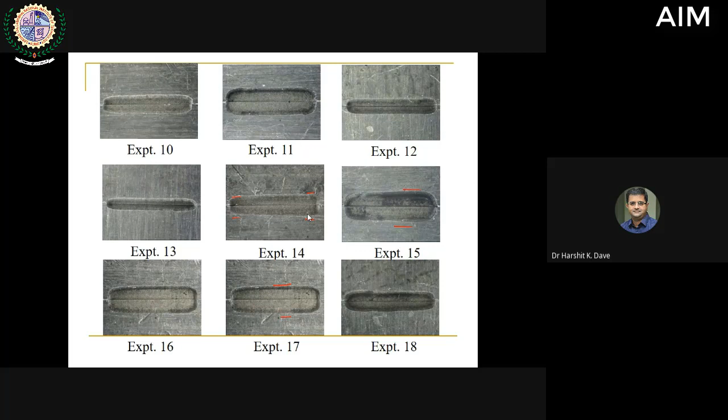This happened because the tool got worn out while moving over it. So it created micro features, but it was not successful. Because of the deposition, the size of the electrode increased, so you can see the size of the cavity has also drastically increased. Even to some extent you can see the taper here and here. So there is great disparity of the feature when you try to create this micro slot on a regular EDM.

But then what we did was we tried to create the same size of slot on the same size of workpiece using our micro EDM setup. But then the parameters would change.

Here capacitance will come into picture, and there would be a scanning speed also.

It is interesting to note that in case of regular EDM, the tool does not rotate. But in case of micro EDM, because the tool is held in the spindle, it will rotate. So you always have a rotating micro EDM process, unlike the regular process where you do not have that feature. Probably if tool rotation was possible on the conventional EDM, then that deposition might not have taken place, and the wearing at a particular edge, generating it like a chisel, would not have taken place. So that is one of the limitations of those observations.

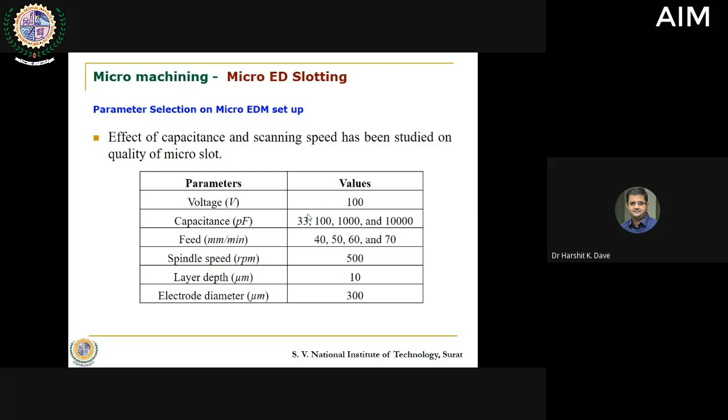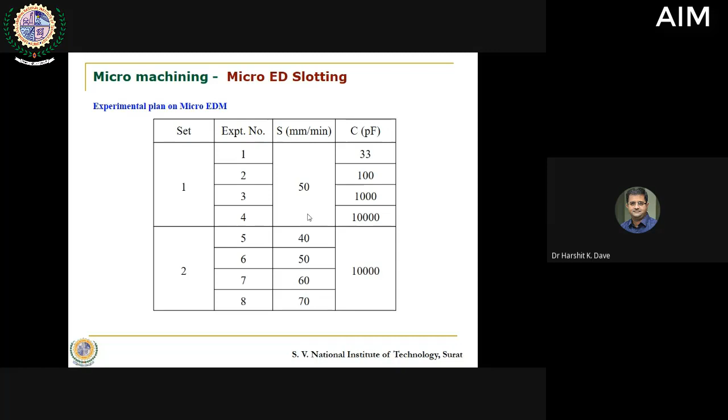We kept constant values of certain parameters, but tried to observe the variation in capacitance and variation in feed. We tried different parameters which we measured with our vision measuring system. So, one factor at a time, we fixed the speed and varied the capacitance, and found that maximum capacitance was good. So we fixed the maximum value of capacitance and varied the speed.

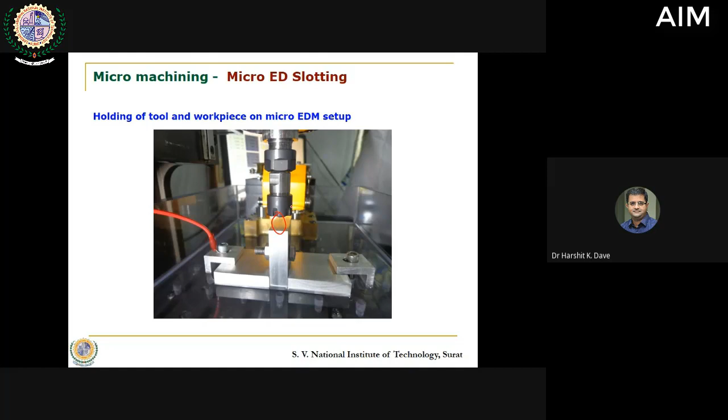So this is the setup. You can see the same type of workpiece is held, and here there is a micro size tungsten electrode placed into it. Then we carried out the process the same way, only difference being that here the tool rotates. So here you have a rotating tool, and it tried to create this slot.

Now the depth of the slot, say 1 mm or 2 mm, whatever we try to achieve, the tool would travel this way, rotate, and travel on a path. Then it will try to take a small depth, say 0.01 mm, return back, and then take another depth of 0.01 mm and return back. Whereas in case of EDM, we had X and Z movement, adjusted along X and fixed Y. So it's not that it will move this way and come down, it is this how it moves. So if the first depth required is achieved by moving across and reaching back over here, the tool will travel across this path with movement in X and Z simultaneously.

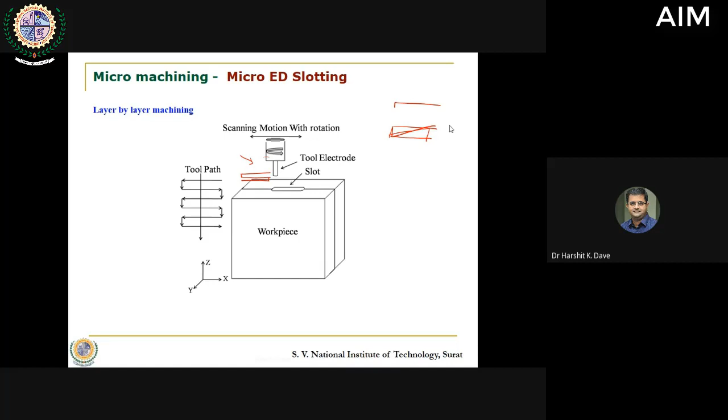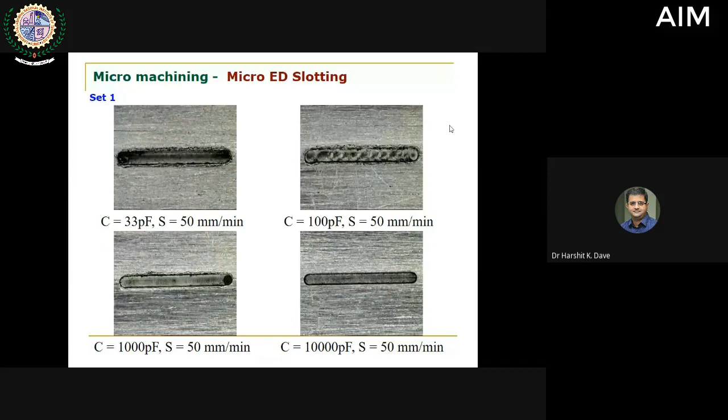So probably that also was a reason for a larger amount of wear occurring. But then this worked well. Layer by layer we removed the material, and eventually this is the type of cavity, the slots that we got. Slots were reasonably good at higher capacitance as compared to lower capacitance, and we did not observe a major effect of the speed. Most of the features are good enough, so speed did not have that much effect as compared to the capacitance. Capacitance had a tremendous effect on the quality of the slot that were generated.

So this is what we have tried to work upon at our place. There is a good scope of working in the micro domain. Many small things can be done. Another observation is that micro machines have better capability of creating micro features as compared to the regular machines.

There is a possibility of innovative use in generating different types of features. Why can't we create a feature like circular steps moving inside, or maybe moving outside? Or can you create a pyramid or not? So there are many ways of working over it with different features.

And then the issue that comes over here is the measurement. All the measuring instruments that we have are imported. So DST has come up with an instrumentation type of scheme also, wherein it is encouraged to develop instruments for measurements indigenously. So there is scope for indigenous development of instrumentation also for the micro features or the nano features. These are different opportunities that we have.